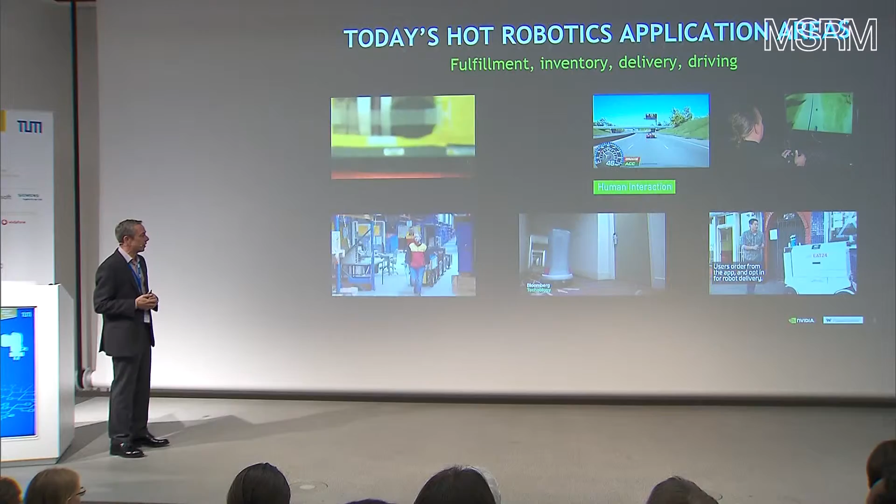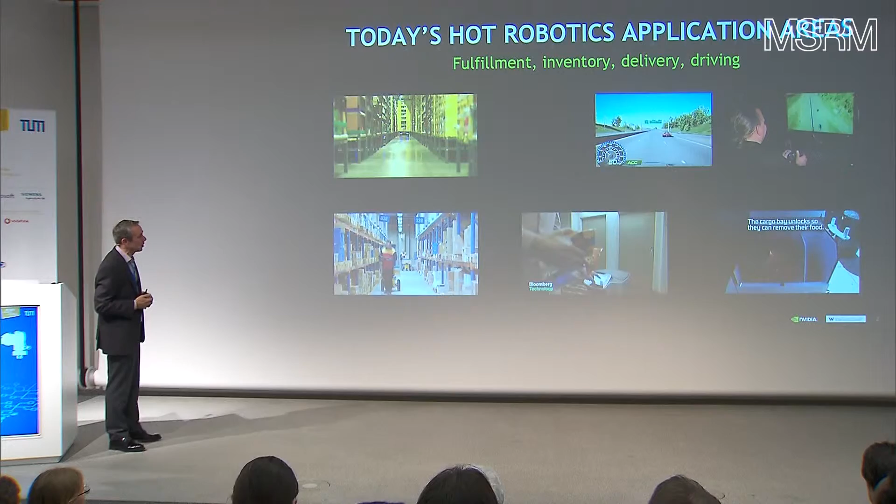Lower down here, you have work, for example, Savioke robots that are delivering food and other items in hotels. Also, we're starting to see delivery robots in urban spaces, and of course, the big elephant in the room is the self-driving car domain, which you can see here on the upper right.

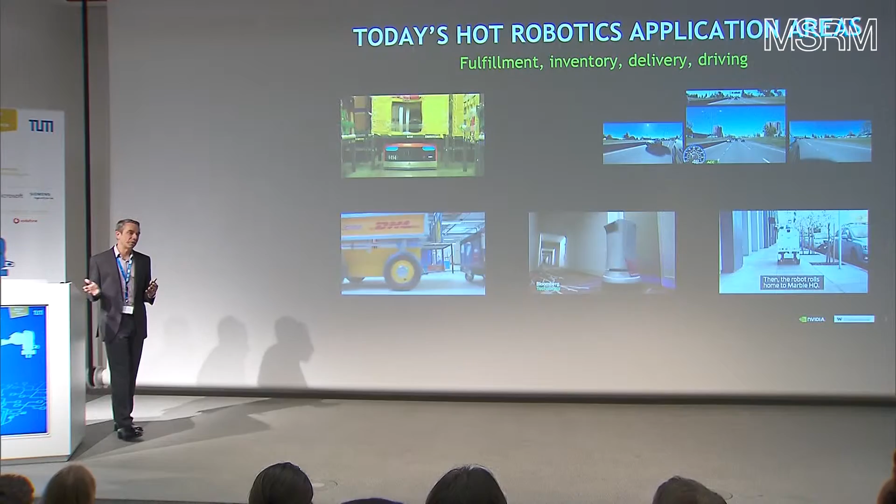In this domain already, Nvidia is very heavily engaged, and the idea of Nvidia is also to provide, let's say, the brains, the computing that drives these kinds of robotic systems.

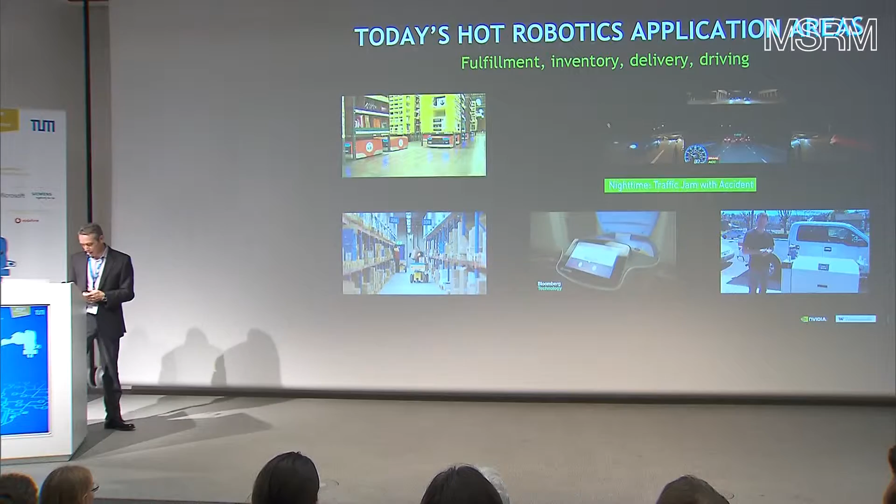If you now look at this from a high-level perspective, and I'm sure several people in the room, my research colleagues might agree on this, if you look at these applications that I just showed you, it's actually mostly just about getting from A to B without crashing into something.

So if you think about an autonomous car, I want my car to drive me somewhere, and in the meantime, it should just get through traffic without crashing into other cars, into buildings, people, hopefully even bicyclists.

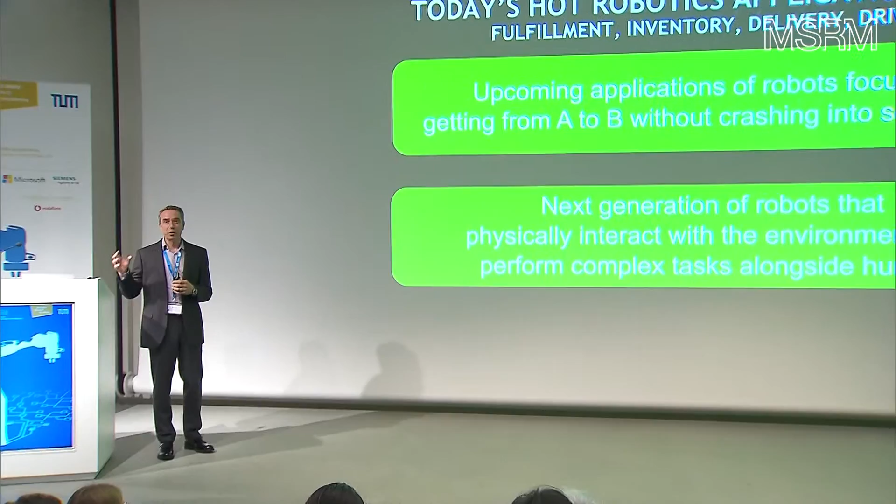But we believe that actually the next generation of robots will be much more about seeking physical interaction with the world. The first part is really about avoiding any contact with the environment, because you don't want to crash into things. This is really about robots that seek interaction with the environment so that they, for example, can pick up objects and help people.

And they do all of this in very close proximity to humans. So again, it's not about staying away from people, but doing this close to people and physically interacting with them and helping them achieve certain goals.

So the robot needs to understand the language, what you say. It also needs to use this example to learn what the object is in the hand, that this is a test tube, colors red or things like that. Then you might want to be able to just tell the robot how it should perform certain actions.

Turns out in a wet lab it's important, like how you shake test tubes and things like that. So you should just be able to demonstrate it to the robot once, and then it should be able to execute that. And finally, you want to then be able to collaborate with this robot over multi-step complex tasks, where the robot takes over certain steps and the humans, and you are interacting in a very natural way.

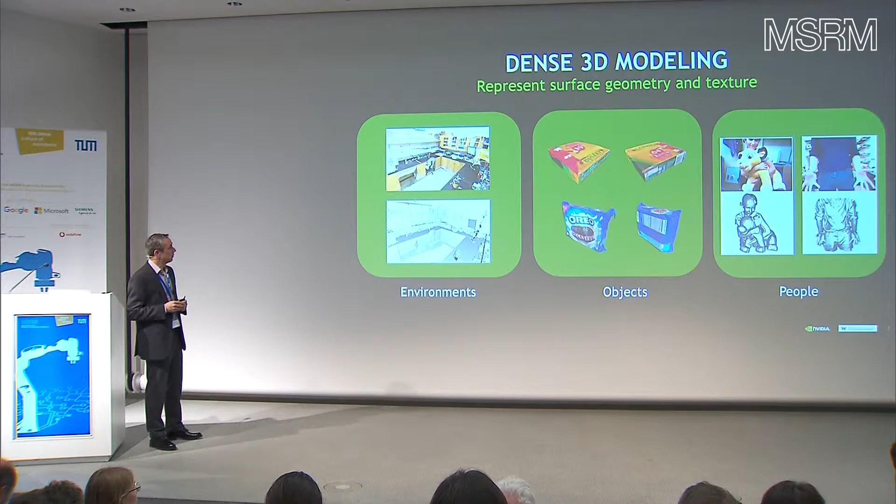On the next slide, I want to show you roughly how we build these models autonomously using these depth cameras, and then I'll go into some examples of how we can actually use them for robotics. Here's some first work where the idea is you get a stream of depth camera data, and on the left you can see the 3D model of this wet lab bay as it's evolving over time.

The idea is very simple. You build a 3D representation and you take your depth camera data and stitch it together. It's similar to the techniques when you do a panorama on your iPhone or whichever phone you choose, where you use this information to put it into a consistent 3D model, in this case.

We can do all these techniques now in three dimensions and in real time at 30 frames a second. And there are many different techniques that can achieve this nowadays.

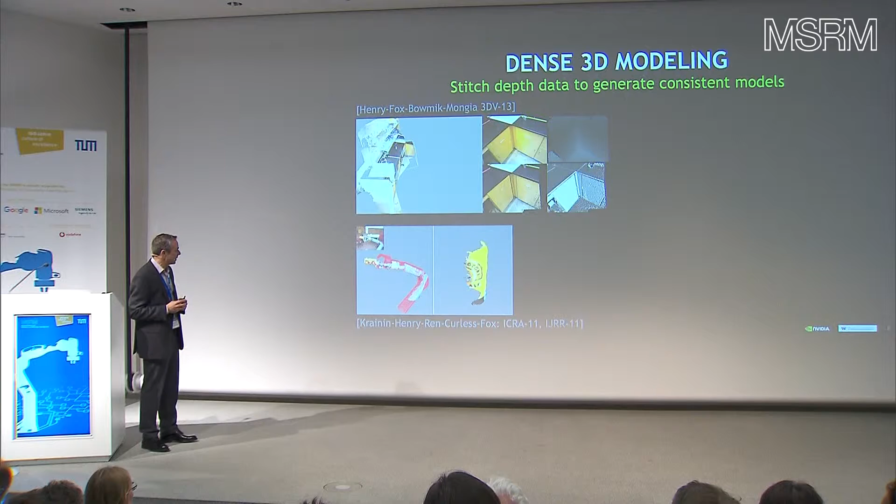Here you can see some work where we wanted to enable a robot to autonomously build models of objects that it might interact with. In this case, it has a beer can, which is of course very important, in its hand, and it's moving the can in front of the camera so that it can build a 3D model of the object.

You could imagine a robot navigating around, it hasn't seen a certain object, it just picks it up and then builds a 3D model of it.

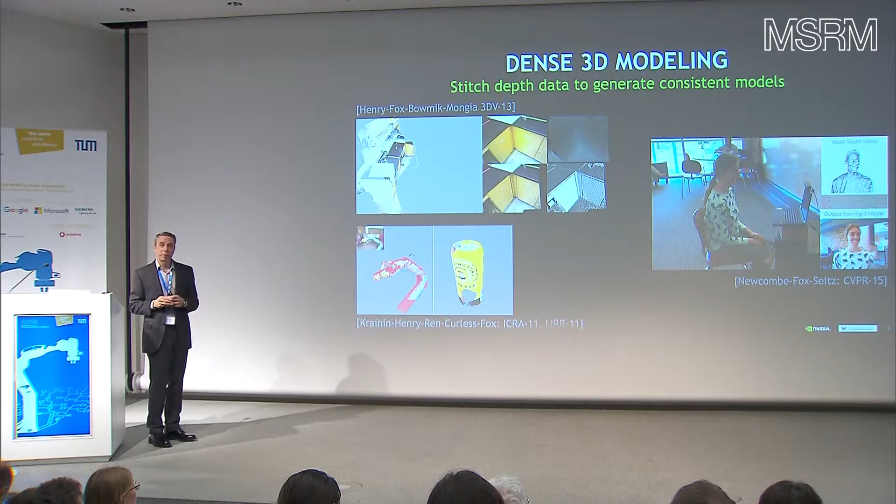Finally, actually the most tricky part is building 3D models of people. The problem is people don't hold still, which means they might move, making it much harder than building models like the ones you see on the left, because there the assumption is always that the thing you are mapping is not changing, it's a rigid object. In this case, humans are, of course, possibly moving.

So what you'll see here is, on the left side, just the outside view. In this case, the depth camera is on the laptop. Here you can see the live depth camera video seen by that camera, and down here you see the 3D model of the person that we are building.

You can see here that it's more or less doing a denoised version of the input information. At the same time, the tricky part is that we are not just modeling the 3D geometry, but we have to constantly also update the deformation of this object model. So this is technically the trickiest part.

Richard Newcombe, who was a postdoc with us at the time, was able to implement this on a GPU in real time, so this works also at 30 frames a second, which for robotics is always important, that it can do these kinds of things in real time.

Now that we have object models, the question is, what could you do with an object model? Here's one setting that we're currently looking at in our lab: we have, in this case, an ABB Yumi robot, and it has a model of the cabinet in front of it.

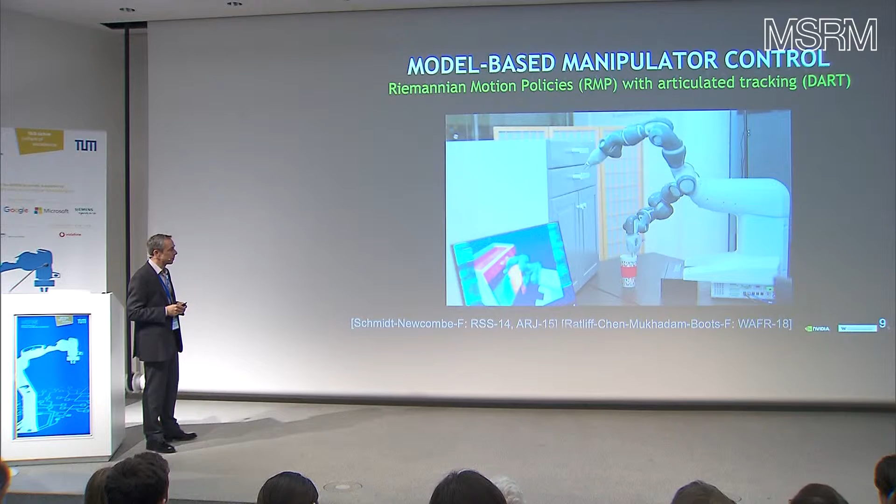There's a cup here on the bottom, and it wants to put the cup into the cabinet. What you see in the lower left is the internal representation the robot uses for planning and control. It has a depth camera you can't see in the video, but it's somewhere up here. It's using information from just a single depth camera to keep track of the object and the cabinet as it's interacting with it, and then to perform its control.

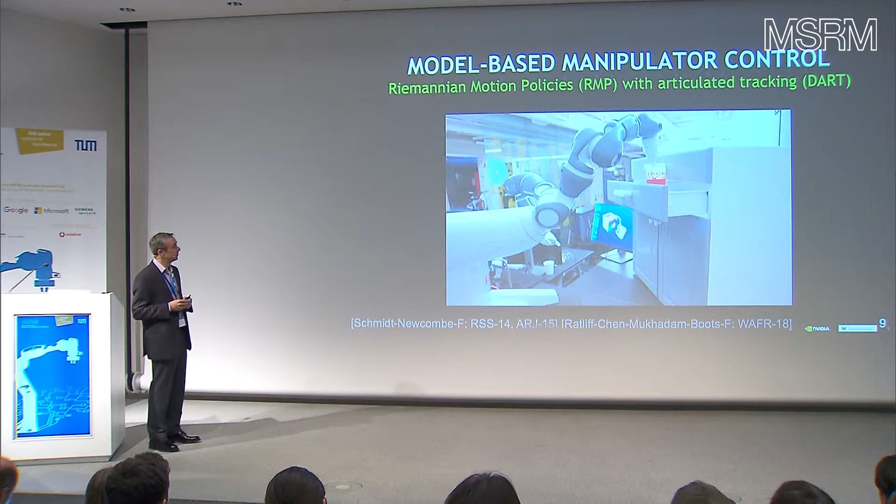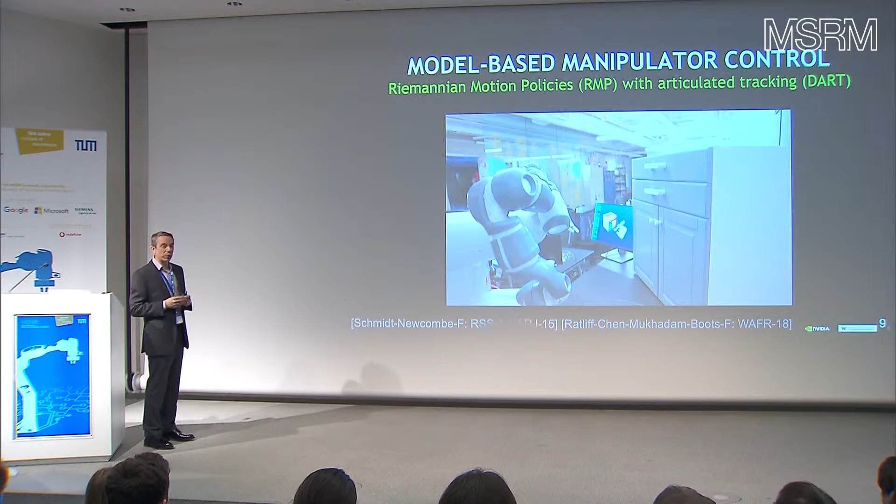This is an example of how we can use these 3D models to perform higher level tasks. What we're looking at right now goes beyond the cabinet, but doing something like this in a full-blown kitchen with many objects in the environment.

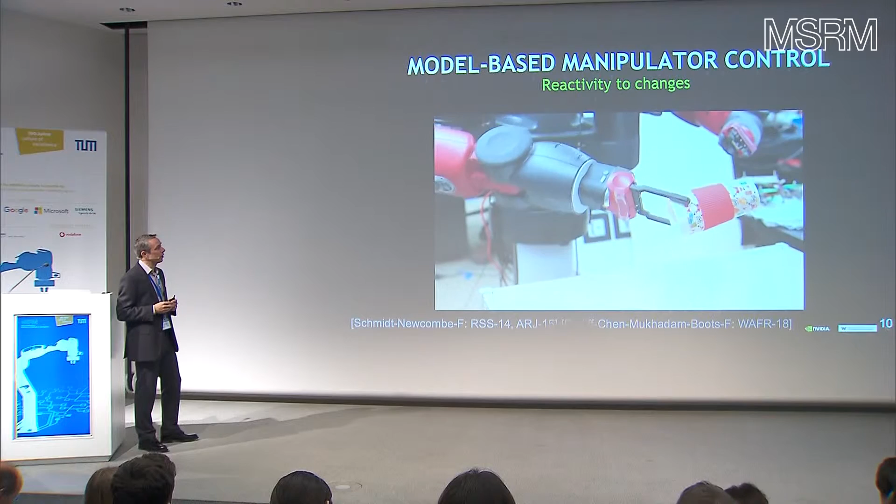Here's one more example that shows we can do these controls in real time, so it's very nicely adaptive. Here the robot hands over the cup, and you can see that the human was kind of pushing the cup out of the way.

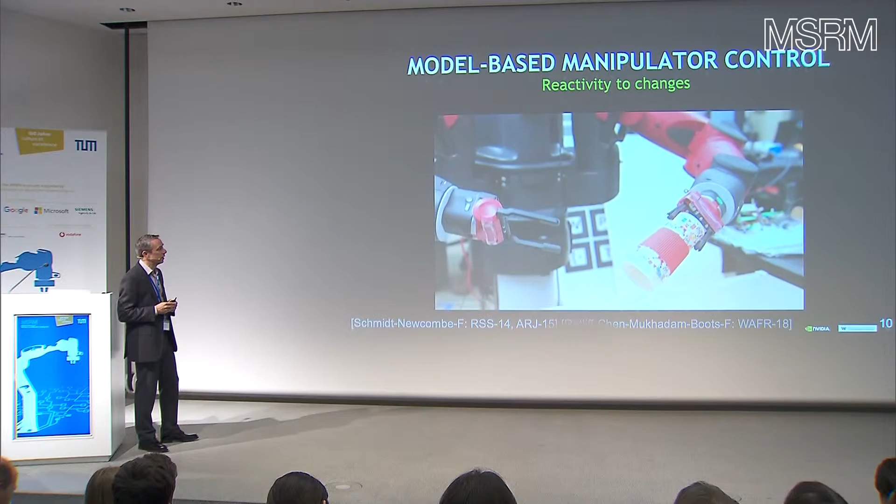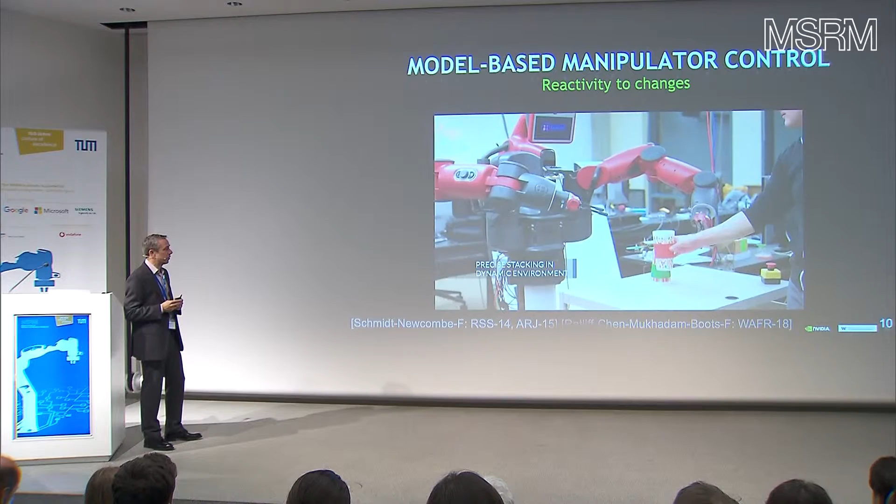One key concept here is that we're using a technique called Riemannian motion policies, which can very reactively and quickly recompute motion controllers on the fly as things in the environment change. So here it has to pick up the cup from the person and then stack it on top of the other cup. Again, we are combining motion planning and motion control with real-time feedback so that it can react to these kinds of things pretty smoothly.

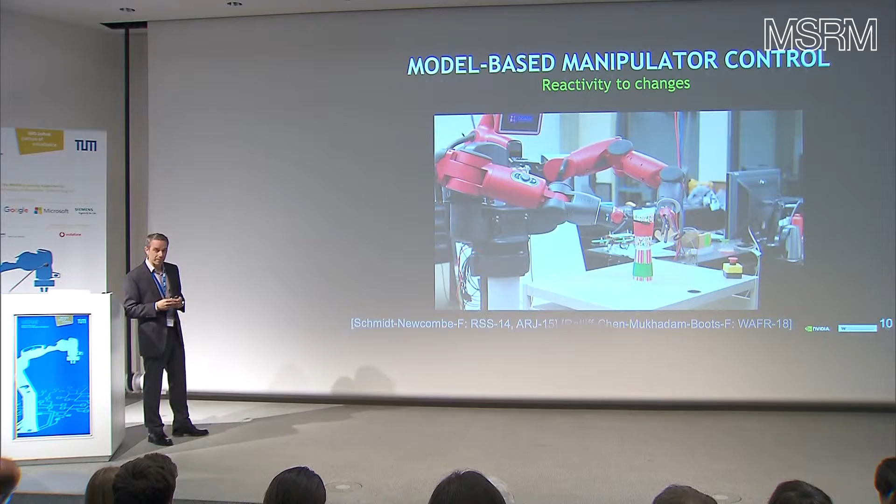This distinguishes these kinds of robots already from what you typically see in industrial settings, where the assumption is that everything is under the robot's control.

One setting where I think it's also going to be important to track not only rigid objects, but to track, for example, humans and their shape, is an application domain that Charlie Kemp at Georgia Tech is investigating, working with people with physical disabilities. This is a study he did with Henry Evans, who is impaired in that he cannot move his body beyond the neck. They were looking at use cases, what people would like robots to do, and in this case, for example, it's shaving.

I know it sounds a bit scary, but they saw that this would be a really good use case. For example, pulling up the blanket, so if he's getting cold or warm, you can change that, or even things like holding a napkin to the mouth.

I think if we want to investigate these kinds of settings, it's not going to be sufficient to just track a skeletal model of the person, but we need to know where the surfaces are. Here's one example of work that my student Aaron Walsman did, where you can see in real time on the right side that we have a skeletal model of the person, and we are tracking the deformation of the surfaces in real time, because you need this kind of representation if you want to, for example, shave someone or stuff like that.

So far, all these techniques were what I call model-based, which means we very well designed the physics underneath the data generation, for example light rays, and the 3D geometry of scenes. These can work very robustly. One key limitation I haven't mentioned yet is that these models always have to be initialized. For example, if the robot should pick up a cup, we first need to know where the cup is initially. In this case, we actually just initialized it manually, but ultimately we want to be able to detect these kinds of things in real time as well.

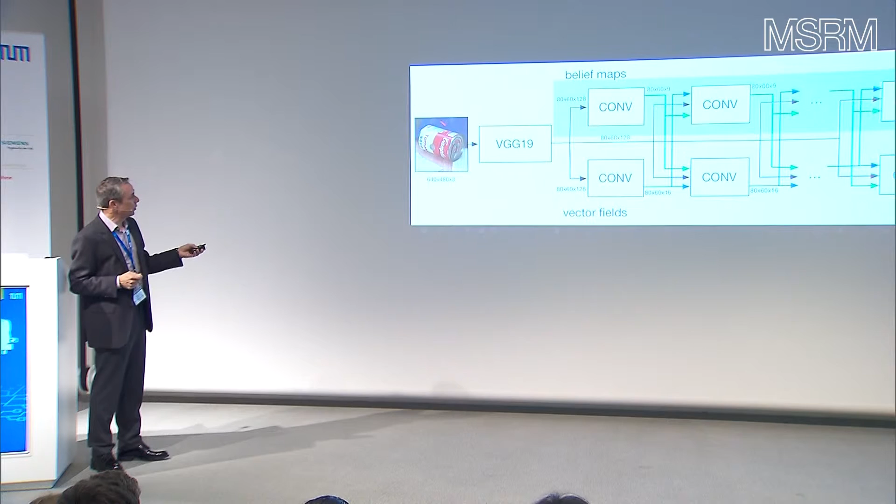This is just one network that we developed. There are many different networks out there that can do this kind of work. I just want to give you the high-level idea, where the idea is you input an image of the object that you have trained on, you feed this through your network, and then the output, in this case, for example, might be a bounding box model of the object that is oriented in 3D. And in this case, the network needs to learn to detect these corners of this bounding box.

In order to train these networks, the key problem is you need to generate a lot of training data, which means you need to give it many images of the input of the object and the desired output pose. And doing this manually is just a very, very tedious task.

A traditional way of doing this is you put these objects in a scene, and then you go around with a camera, and you do this many, many times. Here we did a data set that I think had 92 videos, which means 92 times you move it around, you change the lighting conditions, and use that as your training data. And that works, but it's actually very, very time-consuming, and at the same time also it doesn't cover enough lighting conditions sometimes.

So one approach that we just developed that works actually very, very well is just randomly generating data through simulation. In this case, you have a 3D model of the object, and you just randomly throw these objects into the scene. You change the lighting conditions, the appearance. Since it's simulated, of course, you know the ground truth locations of these objects. You might also even look at scenes that are a bit more physically accurate.

And then you train a network just on this data so that it learns to go from an image to a 6D pose estimate. And here I just want to show you some examples of how this now works in different lighting conditions. We're still working also on improving the accuracy, so we have some other research, but I don't have time to go into this.

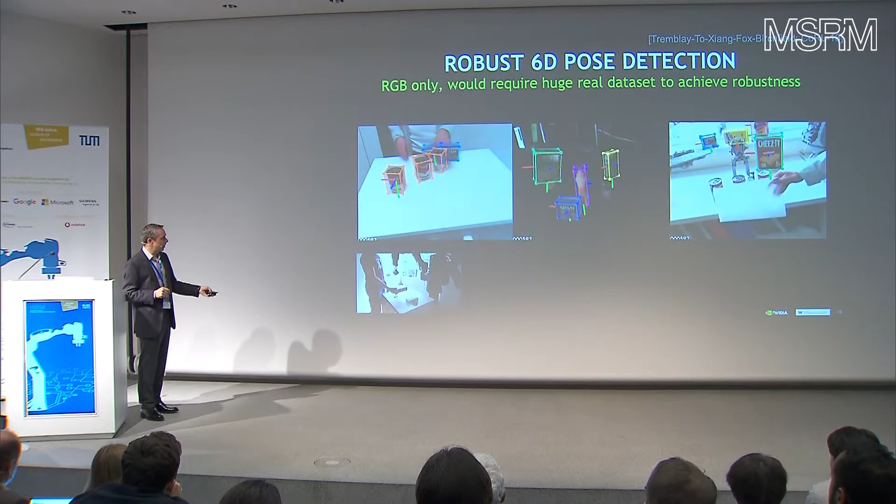But I think this is already very impressive if you look at how different the lighting conditions here are, that the system can really pretty accurately detect these objects and estimate their pose. And that network has never seen a real image during training. It was all simulated from photorealistic rendering. And down here you can see how we can use this then to get the robot to pick up objects and things like that.

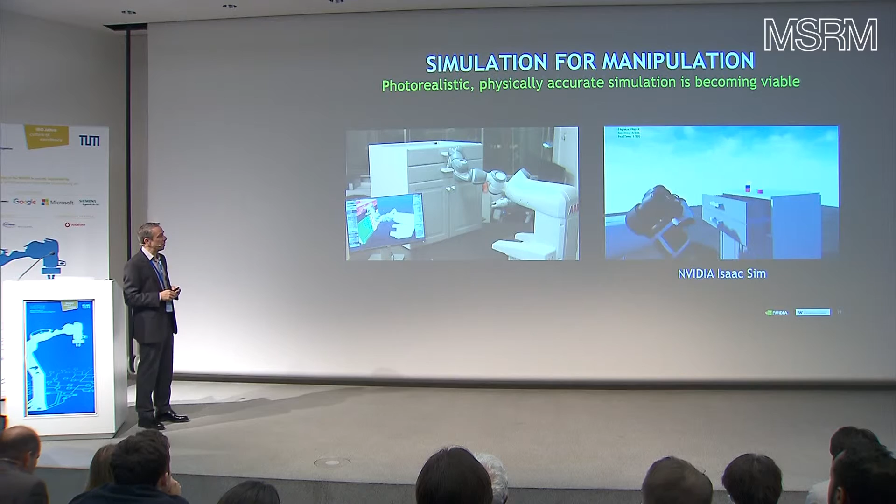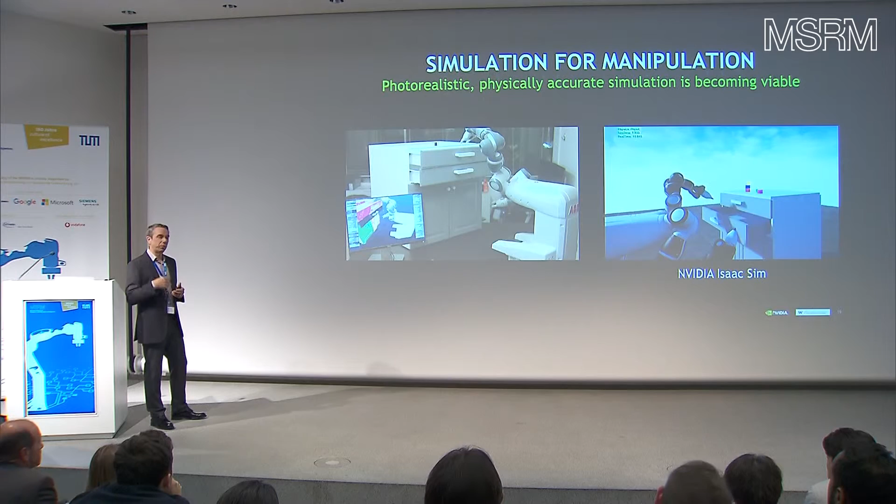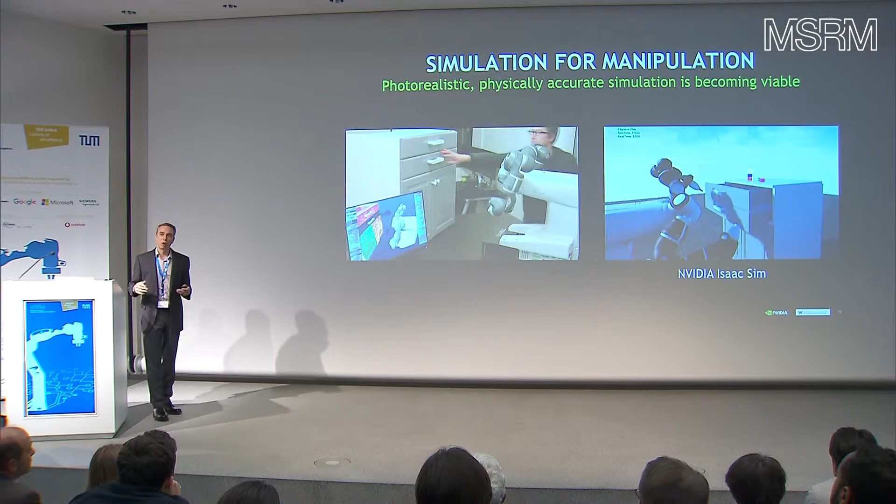In general, I think simulation is going to be very useful. Here on the right side you see an example of a system that Nvidia is building right now, where we can now just run these systems that typically work on a real robot and operate them also fully in simulation, and we get behaviors that match the real world actually very well. So the idea now is that you can use these systems to, for example, improve the robustness of your controller or test out different even hardware systems and things like that.

One other example or advantage of simulation is, of course, if you want to do large-scale training. In this case, one hot topic is deep reinforcement learning. Imagine you want to train that robot on the right to get that little tube into this hole, the peg-in-hole, but now the problem is it's on a rope, so it's swinging around, you don't know the mass exactly. So in this case, we can train a system here in reinforcement learning on the left side, where, for example, on a GPU, you can just run hundreds of them in parallel.

And then you train your reinforcement learning controller, and after you pre-trained it, you run it on the real robot, and there's always a discrepancy. So you can use this real data to refine your simulation, and in the end you get a system that works reasonably well on the real robot.

In this case, again, we did not know how long the rope is. The only tracking that the system is performing is really just of the position of that little cylinder. We also put it in a tilted position, the hole, so that it's a bit trickier. I should actually only show you the second example next time because it's more impressive - the first one was a bit easier.

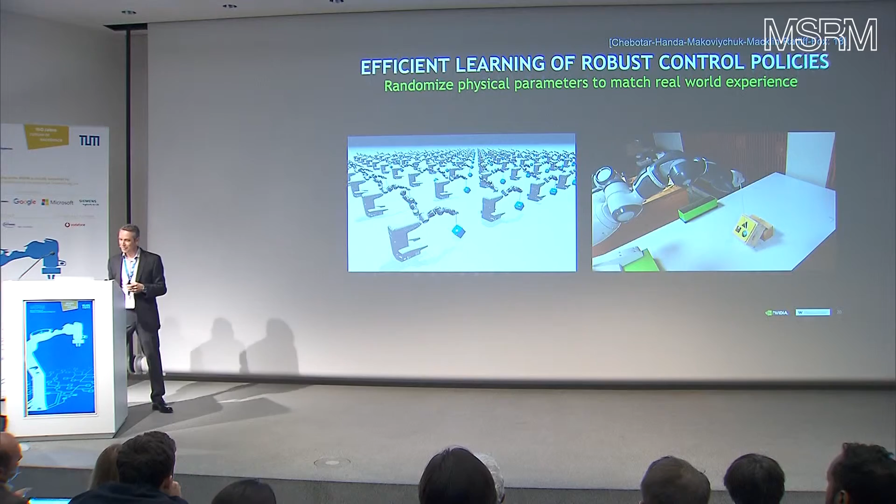So then also other simulation examples for manipulation - this is an Allegro hand, we can simulate the forces and things of deformable objects. We can use the same kind of simulator here again on the right side.

Imagine you want to train a deep network to grasp arbitrary objects. You can now generate thousands of objects, and for each object you can exhaustively try all the different grasp points and then test them in simulation about how well they work.

One final setting of how we can use simulation is, of course, for robot training. This is something they demoed at GTC in the spring this year, where on the left you see the VR setting, and on the right hand side you see real-time simulation.

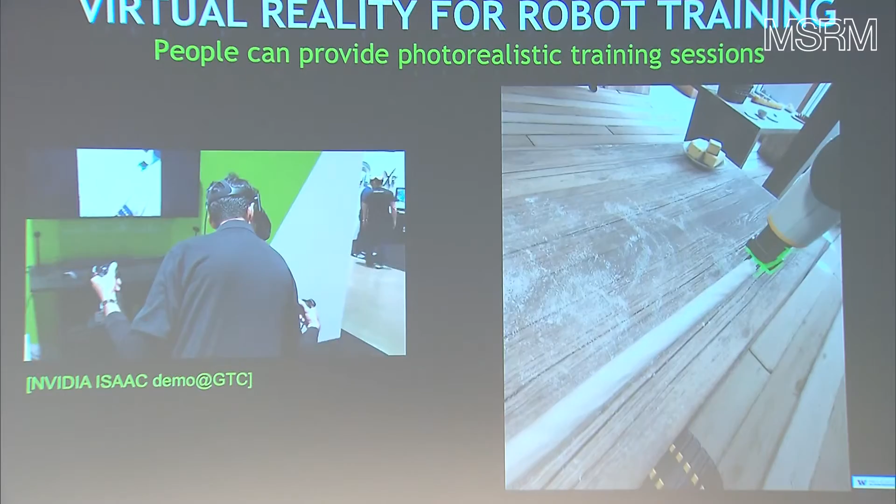So he's controlling the grippers. And you can see the simulation is actually pretty nice, photorealistic. The behavior of the dough is reasonably good. It's not perfect, of course, but you can imagine that can be really useful for training robots.

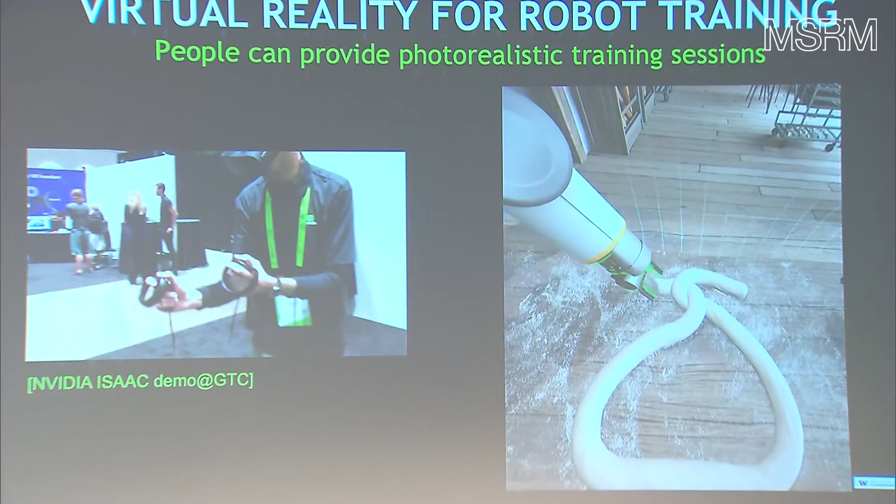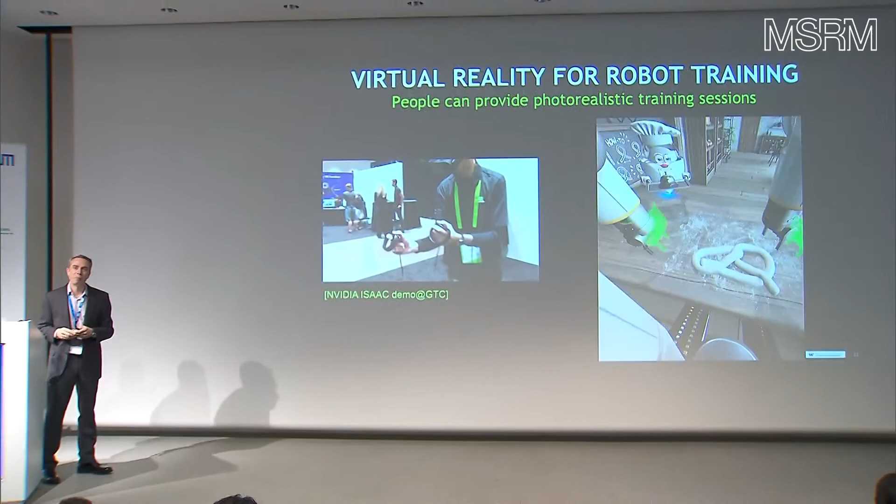And in this case, the task is, of course, the crucially important thing of making pretzels. Very important. But again, I think this kind of setting can really make it much easier to train robots to do certain tasks. Okay, with that, I'm going to come briefly to the discussion.

First of all, I think over the last years we've seen really tremendous progress on the sensing side, on the hardware side. Something I didn't mention is also touch sensing on robots, which is going to be extremely important, I think, and we are seeing good progress there as well.

Also, of course, computing - highly parallel computing. And deep learning advances make robots much better at detecting objects, reasoning about objects, and also people. And I think we will then be able to have robots that can really collaborate with people and support them in complex tasks, across many different application domains.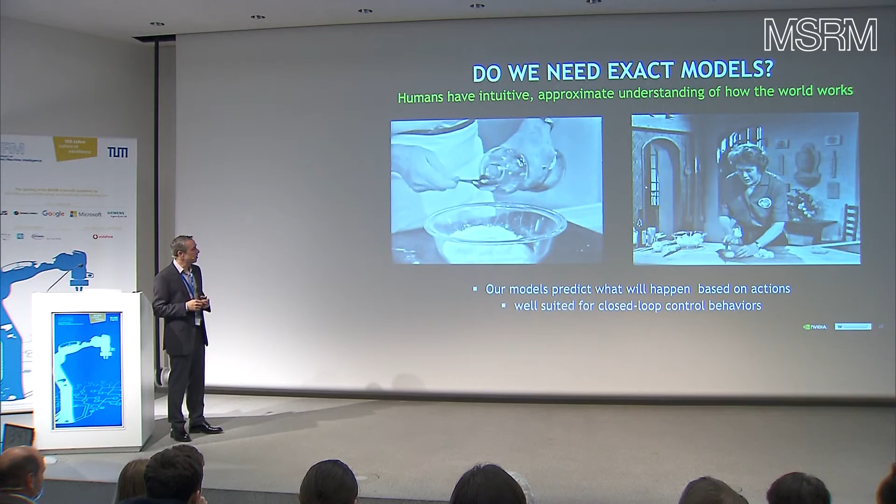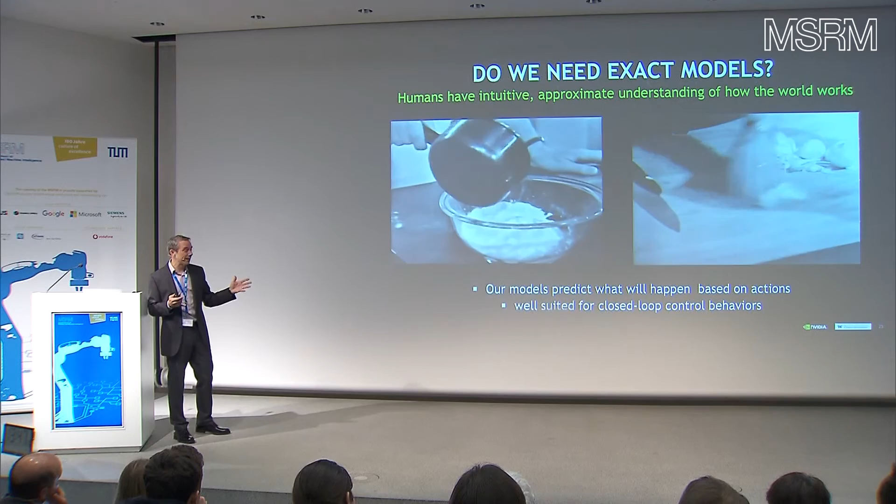She's a very famous cook in the US, and here she's demoing certain things. When we look at this, we have a clearly intuitive understanding of what is going on, right? So on the right side, for example, chopping the onion - not that we could replicate that, but at least we see, okay, the onion is sliced, and then you have these different rings and things like that.

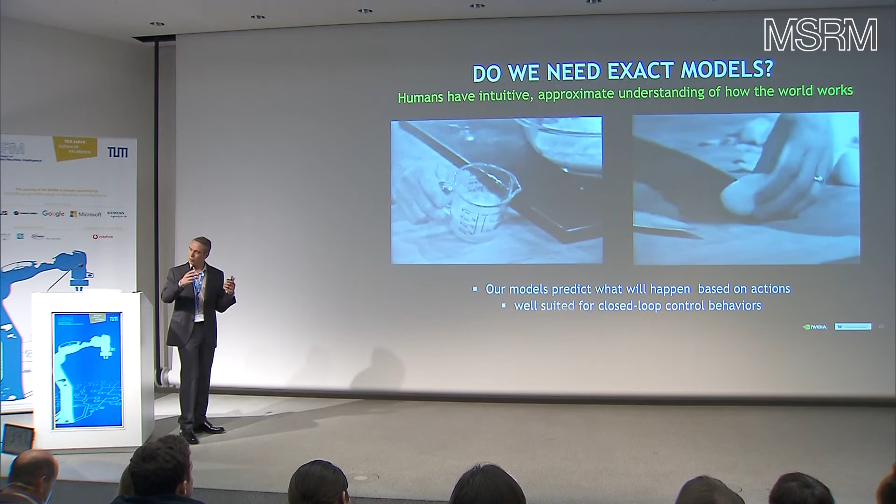Or on the left side, she's making dough, so she's mixing liquids - they have a certain behavior. You can now move them from one container to another. And in robotics, we just don't know how to do these things yet well, right?

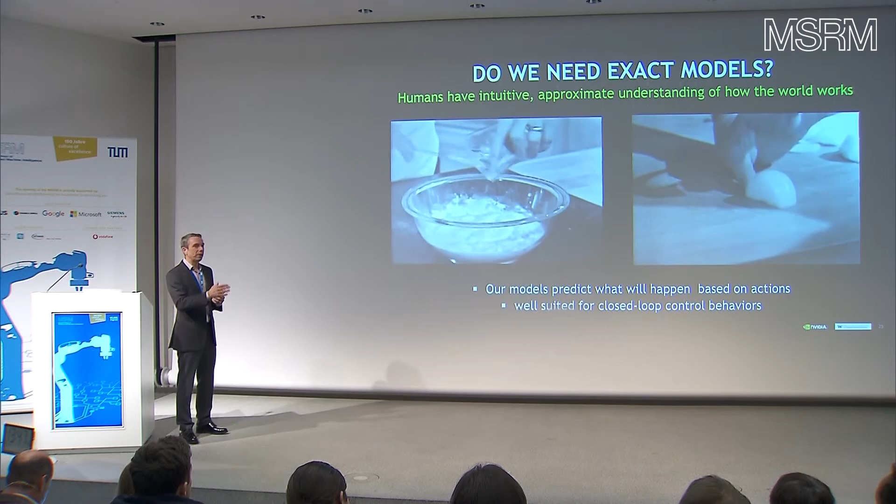And the question is, should we even aim at building highly accurate physics-based models for this, or is there an alternative approach that goes a bit closer to the kind of intuitive reasoning that we humans are performing when we reason about things like gravity or how things behave in the real world?

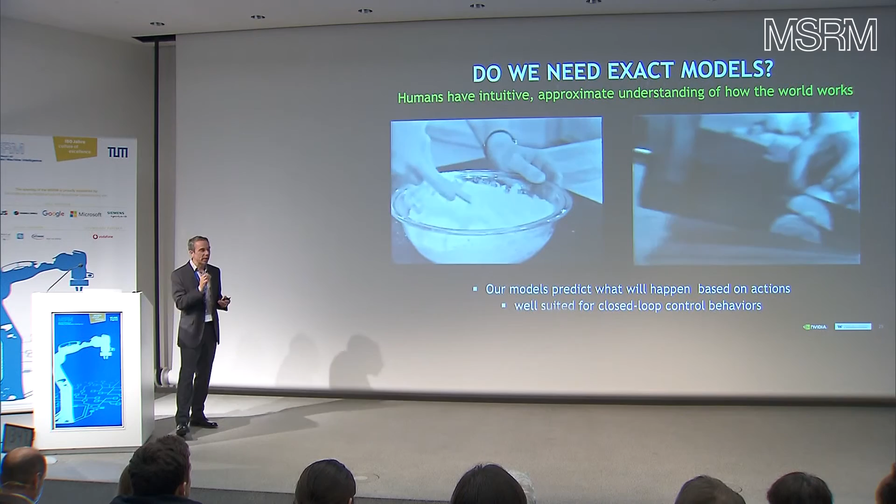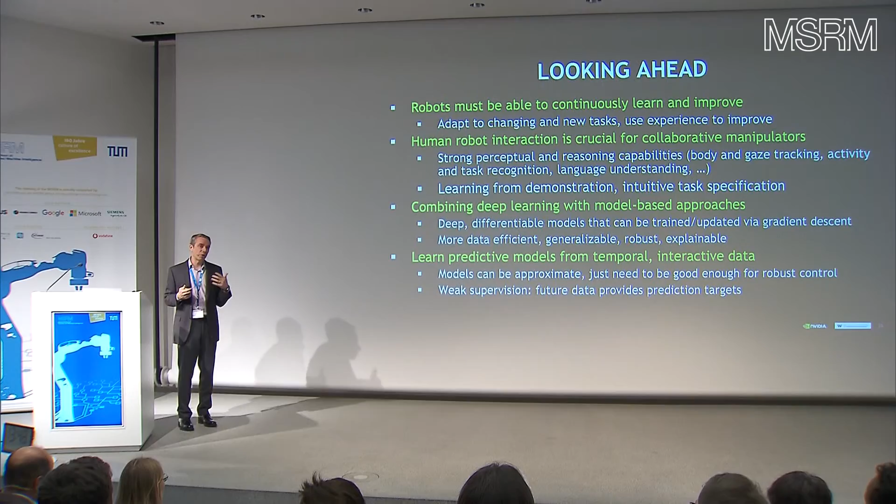So I think humans are a really good inspiration here for maybe the next step, where we want to have robots that perform lifelong learning. I'm not going to go into all the details, but lifelong learning, and also combining deep learning with these model-based techniques, to come at something that maybe also has the robustness of human behavior, which I find truly amazing - what people can do compared to what these robot manipulators can do.

I always, when we sit at the dinner table, tell my daughters, imagine a robot could not do this, right? And they're always like, oh Daddy, I know. But it's really fascinating how easy these things are for us, compared to where we are in robotics still. So there's still a lot of work to be done. Thank you very much.